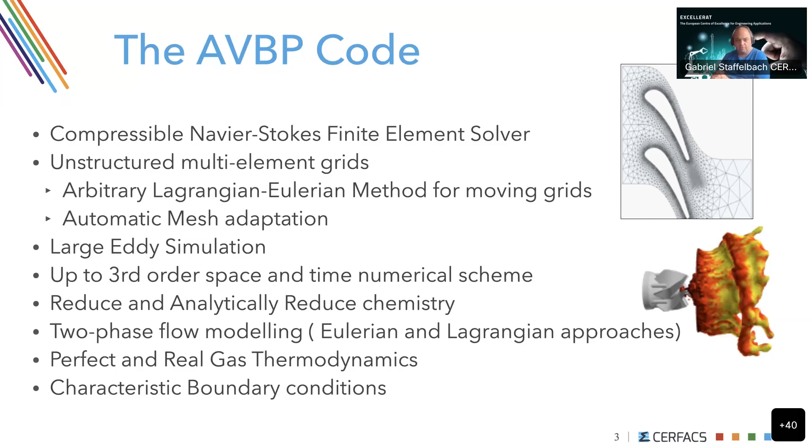Since the main application of the code is combustion, we use reduced and analytically reduced chemistry models. The code can do two-phase and gaseous phase simulations with Eulerian and Lagrangian approaches, so particle tracking. The thermodynamics can be perfect or real gas for complex thermodynamics applications. And since most applications require the study of the acoustics of the setups, we have accurate characteristic boundary conditions.

Regarding the AVBP community, the code is not open source, but it's what we call an open science code. Access to the code for research and non-compete activities can be requested directly at CERFACS. Here is a sample of people using or having access to the code: TU Munich, TU Berlin, ETHZ, University of Sherbrooke in Canada, VKI in the past, CNRS, a couple of labs in France. This is the non-exhaustive list. There's also industrial in-house usage for some partners, and industrial usage by bilateral agreements, so people contact us to do some work on their industrial applications. Here are some examples.

The code has about 30 contributors annually, mostly PhDs. These are at CERFACS, so I'm not counting external contributors. And there are about 30 to 40 papers annually on the code. Here, of course, I'm counting also external papers, not only CERFACS.

The code itself is 500,000 lines of code and uses the SPMD parallel approach with domain decomposition. It's mostly written today in Fortran and C, and it can use MPI 1 and 3 for parallelization. It has full GPU offload for the reactive gaseous phase, only with static grids, for NVIDIA GPUs, and on AMD systems with the Cray compiler.

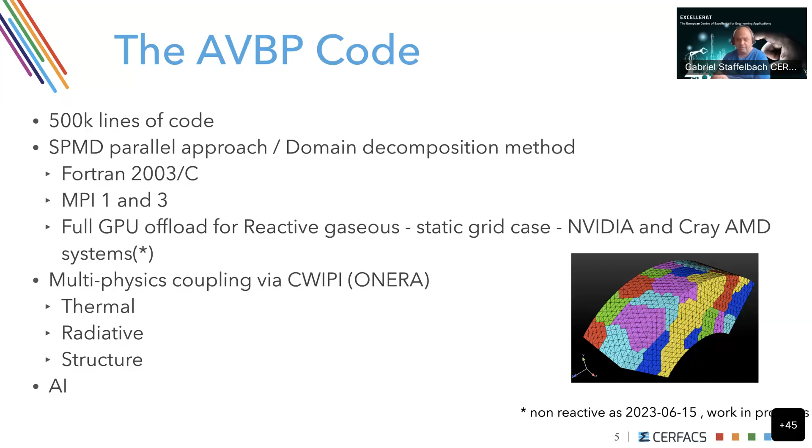And we have also coupling with AI that I will explain at the end. Now, our strategy regarding the code in HPC is in this pyramid, as you can see on the left. Basically, we have the lower end, which are, you could say, closed systems or partner systems, where people do confidential work or contracts, basically. And then you go to the tier one systems that are the national systems in France, where we give support to the community, so the people from France use these systems, and we also use them

for academic purposes. And on top of that, you have what used to be PRACE, now it is EuroHPC, and also specific access when a machine is new, where we do what we call early adopters or hero simulations, or very big industrial applications that require 50 or 100 million CPU hours minimum. And of course, there's also fringe technologies and tests like what we do with EPI, trying for example the RISC-V architecture from BSC or Graviton from Amazon.

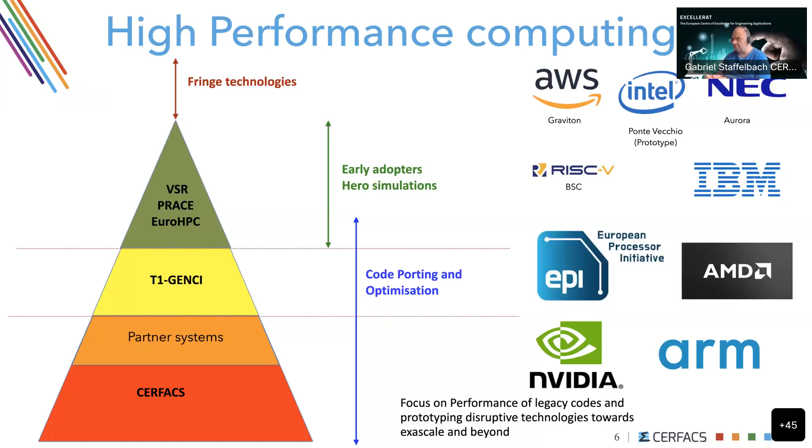And you can see some of the partners for these porting activities and HPC activities on the right, the usual suspects in the world, you could say. Now, regarding applications, the code focuses mainly on combustion. So one of the applications we have done is for aerospace propulsion. This is a real experimental test bed from DLR with 42 injectors that we did on the Irene Rome system at TGCC. And it's, as you can see, basically a rocket engine simulation that was done on 132,000 AMD Rome cores with the

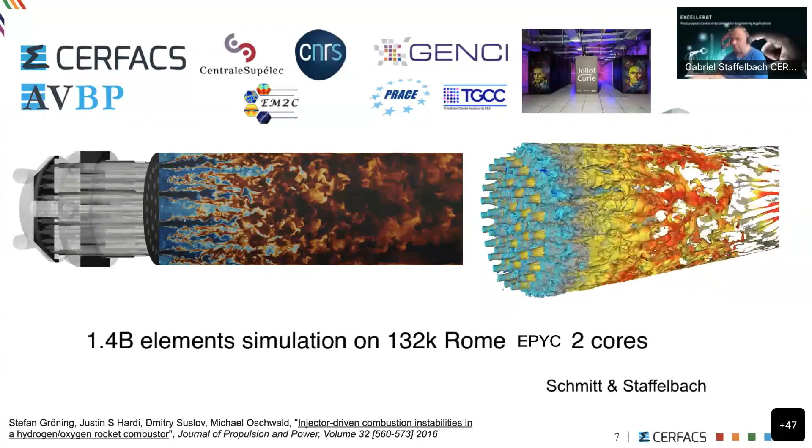One of the main results of phase one of EXCELLERAT was working on the port to GPU using OpenACC for NVIDIA. These are the results that you see on the left. On the bottom first, you have the acceleration between CPU and GPU on V100, so the next to last NVIDIA generation. And since this system had 40 cores per node, we compare 10 cores to one GPU, 20 cores to two GPUs, and 40 cores to four GPUs. So basically trying to have the same costs between the CPU and the GPU and see what the acceleration is.

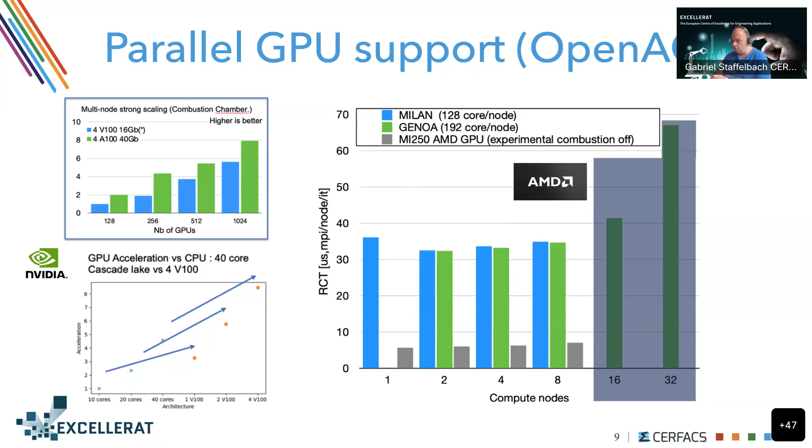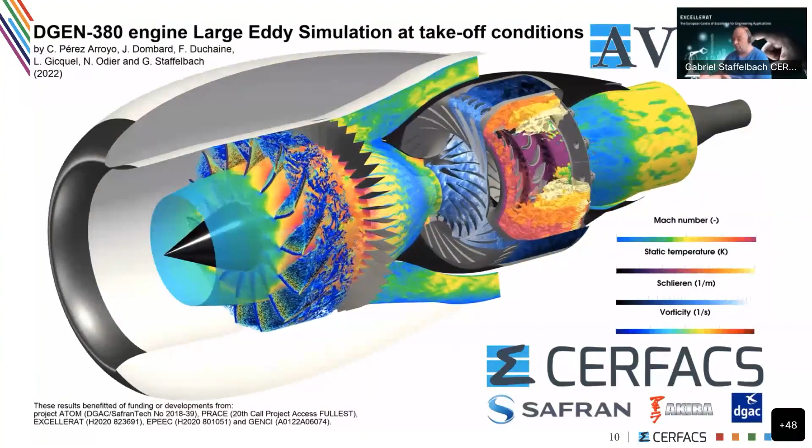But this has allowed us to do this kind of simulation, and this was a simulation that was done last year on Irene again, which is a full combustion chamber simulation with the turbofan, with the turbine, and the combustion chamber. All moving parts are resolved, and everything is done on a single instance. So this is full code coupling live done on this system. And this is actually the first simulation of this kind in the world. Now, of course, this has allowed us to work on other applications.

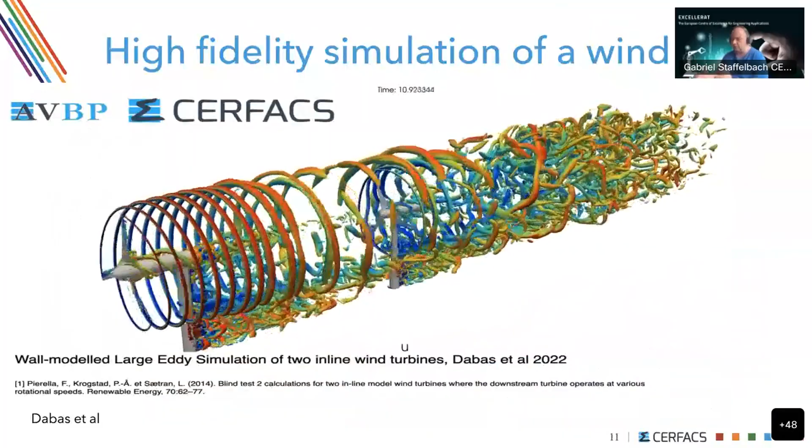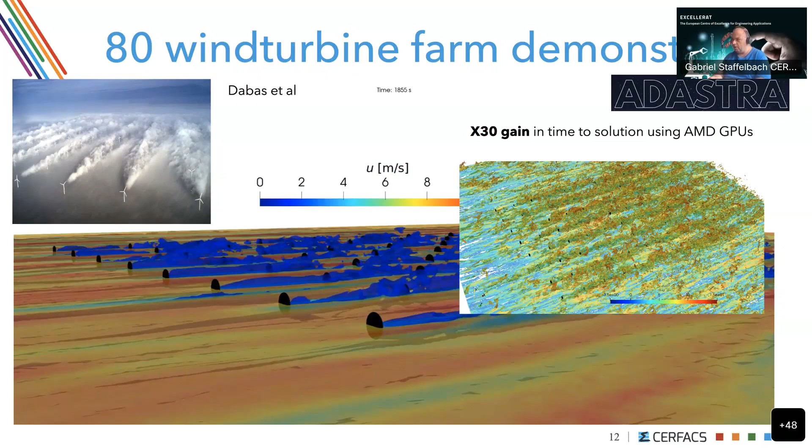Here you can see some basic results we've been doing on this AMD GPU system, and it already has yielded interesting results, especially this 30 times gain compared to a CPU simulation. And now we have a much more resolved simulation that is ongoing, where you can really see the turbulence generated by the wind farm. And with very good power distribution compared to the experiments, we actually match now mostly what happens between the rows and the wind turbines.

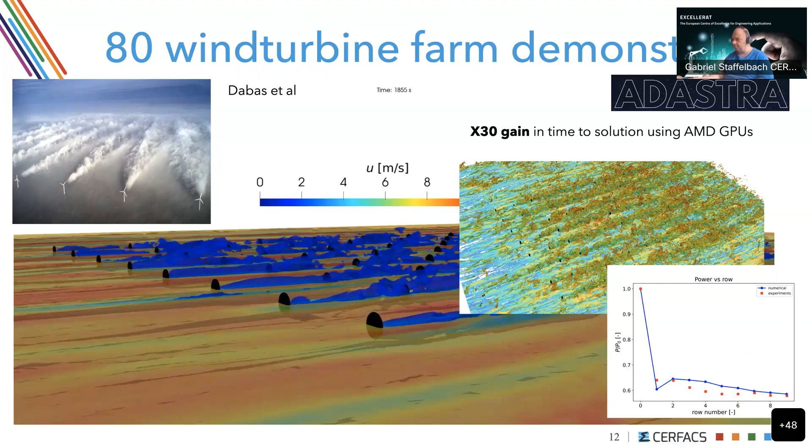Now, in EXCELLERAT, one of the focuses has been mesh adaptation. As I mentioned earlier, in the code it was added during EXCELLERAT. And the idea is to have physics-informed static mesh generation. So looking at the physics and creating a mesh that is fully aware of what the physics should be. And you can see on the left the application to a nozzle. And I dare you to try to do by hand the type of mesh that you can get with this static mesh generation, where it is perfectly matching the structures with the shocks.

And the other application that we were working on in phase one and we are going to start in phase two again is safety applications. So explosions, and for that you need to have flame tracking. And this is the application on the right, where you see the propagation of the combustion kernel, the mesh that is evolving, the turbulence that is generated on the top. And as you can see, it works quite well and gives really interesting results. And this will be published soon.

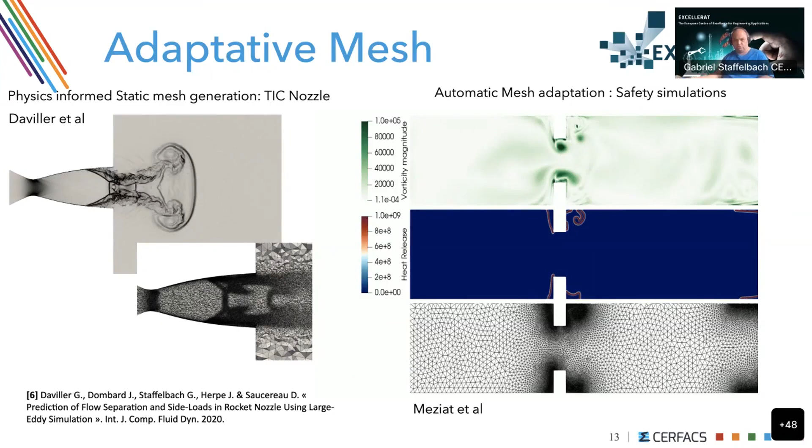And lastly, one of the things that we've been trying to do is a collaboration with the RAISE CoE. The idea is to use AI to replace models, because as most of you know, when we develop models, we have hypotheses on the application. But when you look at the combustion chamber with the turbine, it's almost impossible to get all the hypotheses right. So the idea is to use AI to circumvent this drawback and have models that match the data and not necessarily have hypotheses behind them.

So the idea is to couple the AVBP code with deep learning, neural networks or graph neural networks. The code working on the CPU and the neural network working on the GPU. And this is called PhyDLL. This is a prototype of coupler that uses CWIPI or MPI to be able to do this coupling.

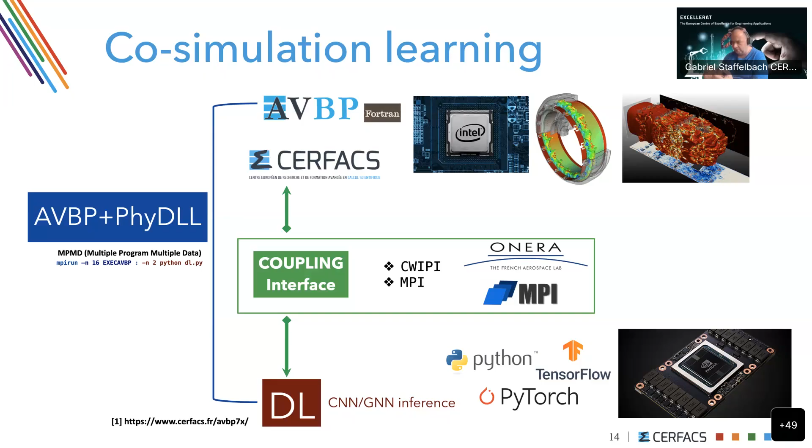And one of the main applications we've been doing is this subgrid scale combustion model with AI, where when we try to solve this flame, it's very wrinkled. It's supposed to be very wrinkled, but the mesh is not resolved enough to do it in the right setup in LES. So we need to account for this wrinkling in the flame. Today we use this Charlette model that is able to adapt corresponding to the LES, but this only matches in some cases, and you have the publication here with more information on that.

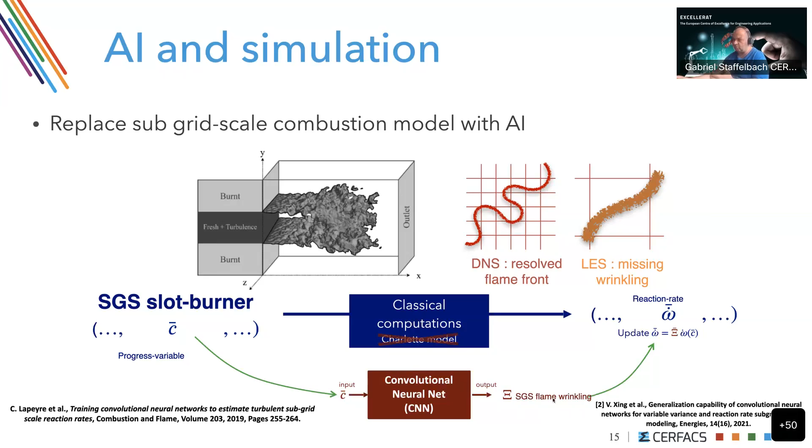So what we do is that we replace this Charlette model with a convolutional neural network that adds this subgrid flame wrinkling directly to the simulation, and this is done live, and you can see here some of the results. So this is the same explosion application used during EXCELLERAT in phase 1, and this is in phase 2. This is the AVBP simulation. This is the neural network partition. You can see they don't match at all, for the domains, of course.

This is the classical simulation, and this is the one with the coupling. And here you have the overpressure simulation. And you can see the propagation of the kernel. Don't mind that it's time shifted, because this experiment is very, very sensitive, even in the real world.

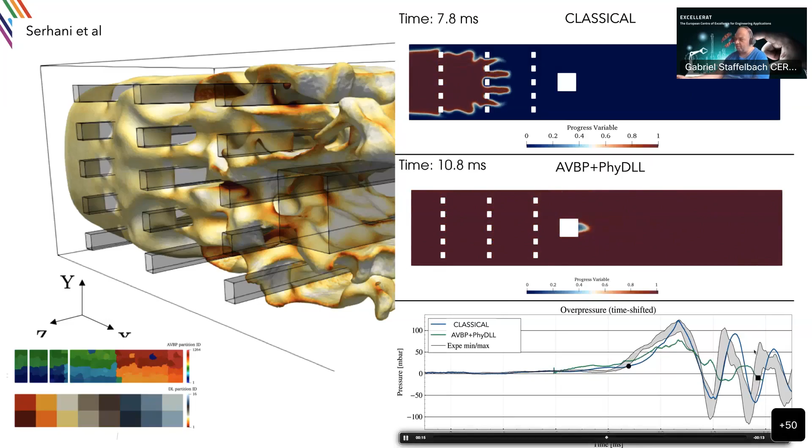What is important is that we get exactly the same behavior of both simulations compared to the experiment within the error bar. So we are now able to couple this model, and all other models can be replaced, like for example, the law of the wall and other stuff. And some people are working on the CFD team on replacing the full numerical scheme

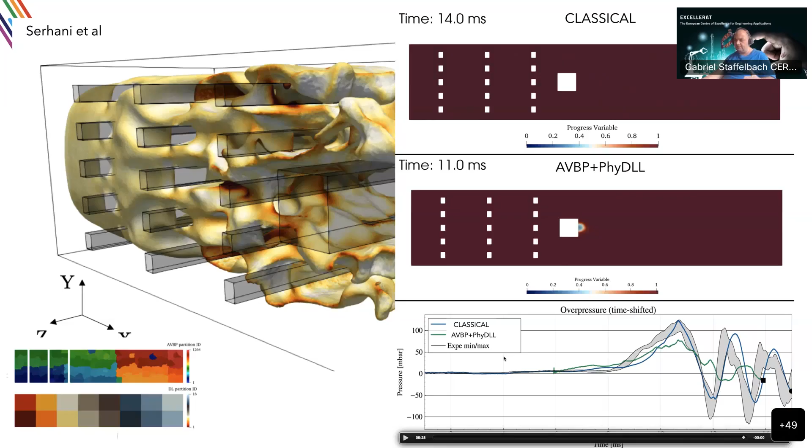with this. So this is a quick overview of the code and the application we've been doing, and what EXCELLERAT has allowed us to do. And if you have any questions, I'm here to answer.

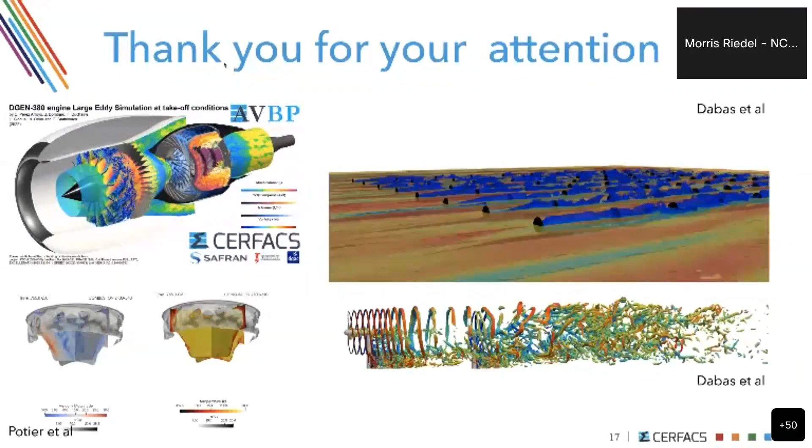My question would be, we have vertical wind wheels in Iceland, right? And they do 3D printing with wind tunnels and so on, and no CFD yet. How much effort would it be for this code, let's say, to rearrange from a standard ventilator to a vertical ventilator? Well, it's just depending on the 3D model, to be honest. So I don't think it's a very big problem. It's just a question of setting up the 3D model. So basically a new mesh and so on of the wind wheel itself.

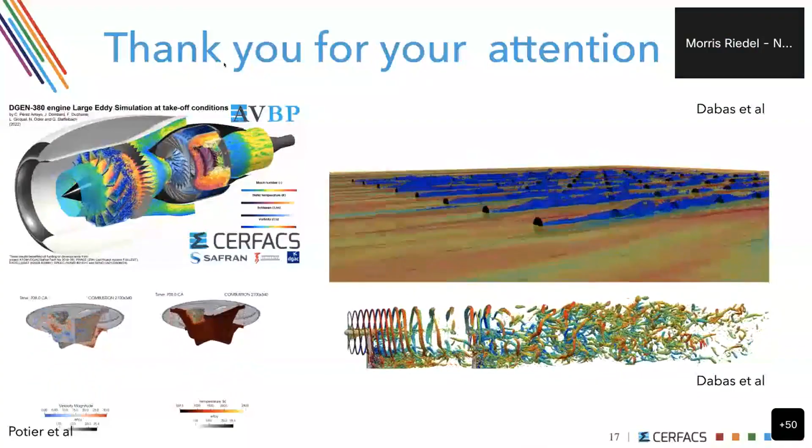Yes, the numerics and the whole code don't have any hypothesis on the orientation of the fans or whatever. So it should be completely blind to it. Yeah, quite interesting. Thank you.

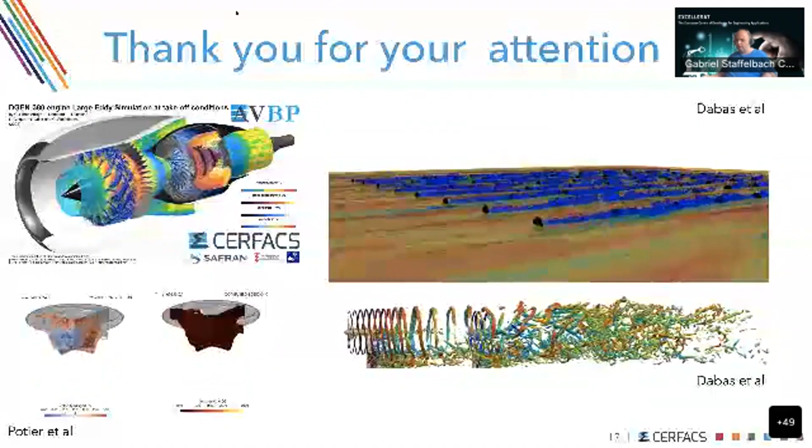Yeah, if I can jump in at this question. So if someone wants not only to access the code, but also needs an HPC system, would it be possible in the future to maybe use JU systems for that? Yes. The code today supports LUMI because it's the main one that we have access to, but we should have access to Leonardo soon, and the idea is to support any of the JU systems.

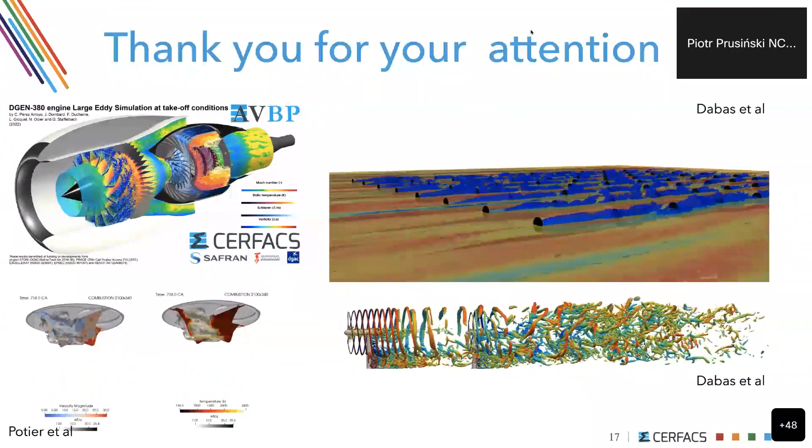Thanks. Are there further questions? If I may ask one question, what is the original coordinate system for the code? Is it Cartesian? By default, it's Cartesian, yes. But you say by default, right? Is it possible to rearrange the coordinate system in the code, or is it something that could be customized somehow? There are some options for rotating flows and rotating setups to do a relative

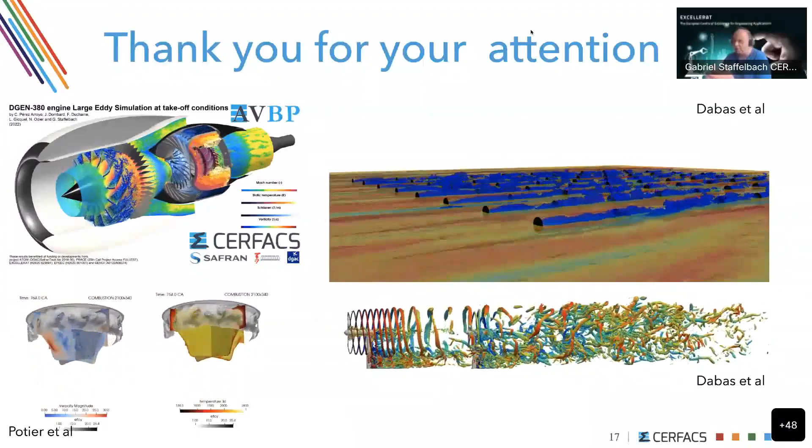coordinate system. It is not overly complicated to change because the coordinates, in fact, are not involved in too many things. We use them as a reference, but most of the indexes are on the nodes. So if you need a different coordinate system, it's not super complicated to use. Okay, thank you.